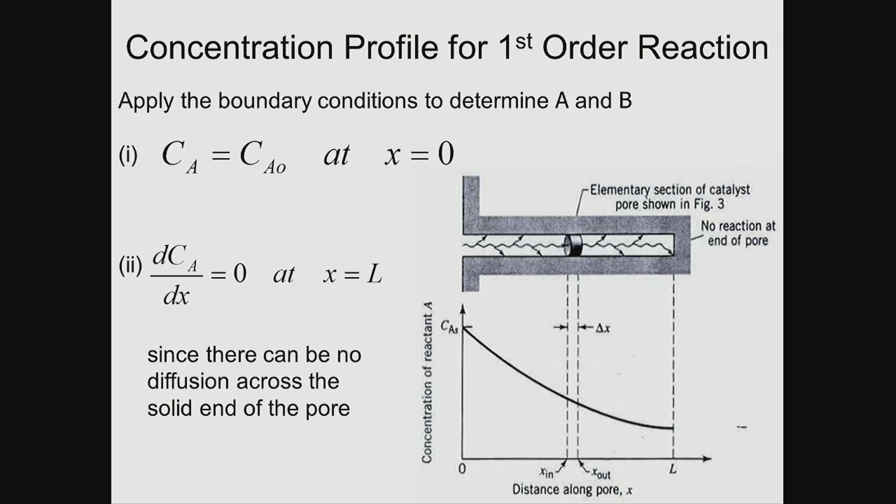Then we put up some derivation, which is in the notes in front of you and should be self-explanatory, to end up with this funny little term called 2ks over RD times the length. In a minute we're going to say that term under the square root symbol is M, and we're going to call it the Thiele modulus, ML.

So look at what you've got. You've got a term for a surface reaction, a term for a radius, and a diffusivity as defined by Fick's law, which I'm reliably informed Tom covered as well. He asked if you knew what he was talking about, and you all said no, but you've already done it before, so now it's all done. I just want you to remember what that looks like.

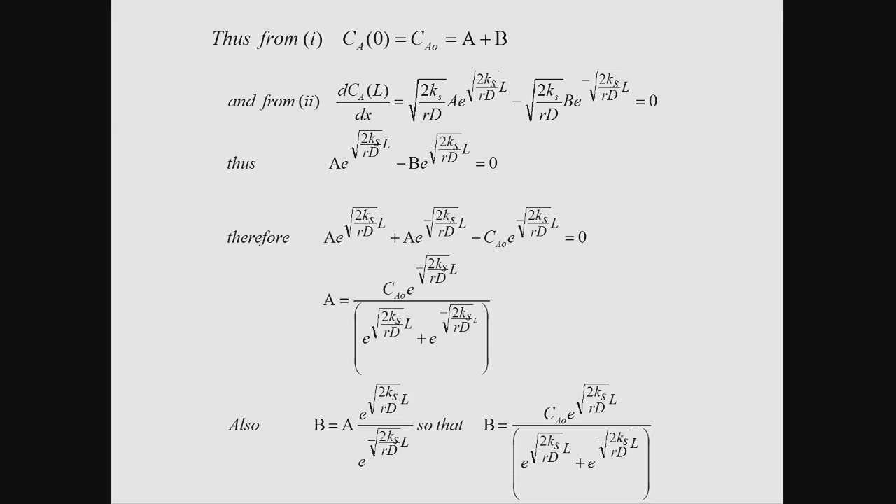This is a definition of a particular thing. You need to look at that, and we'll talk about hypercosines and hypertangents in a minute. All that comes down to something with a hypercosine, ml minus x, which is the length minus the x moved along it, over ml times the concentration in the bulk. So the concentration at any point along that pore is concentration x, at distance x along the pore of length L. And then you've got that term, which we've pulled out as 2ks over RD.

So without too much thought, you can look at that and say, what happens to M if we change the parameters within? If the radius is large, the diffusivity is going to be high. Makes sense? Big hole, nothing stopping it going through. Therefore that term will be large, that term will be small, much smaller than the other, which means it generally gets to be a bigger number. If the surface reaction is slow, that tells you something else. So if that's slow and these terms are as we've just predicted, then we'll have a fairly effective catalyst.

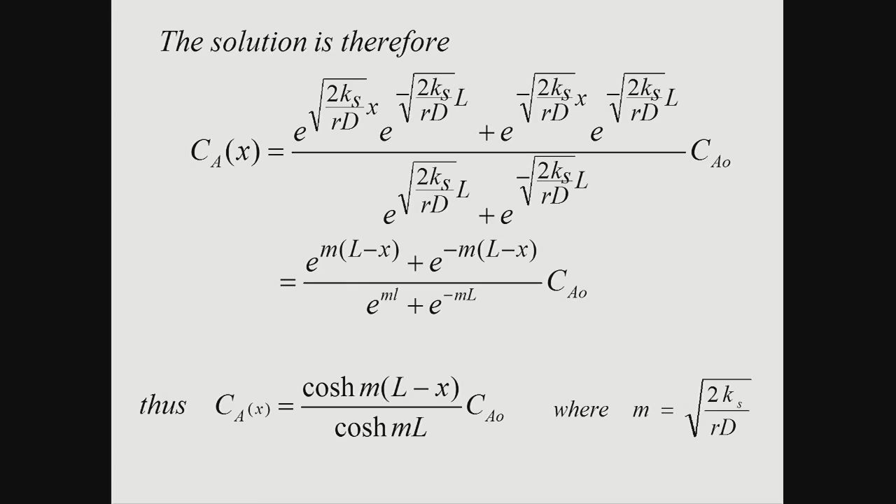If the rate is fast, then you have to argue, why are we using the pore in the first place, and we want the catalyst on the outside. So why are we doing that? This is how you've got to start to think, just rationalize it, because it's not always intuitive - in other words, it's counterintuitive. You think, well, I actually need a large rate. Why is he saying I need a low rate? I need a large rate. So you've got to think about that slightly in the context of the pore.

So look at the graph, the key graph. Always up in exam questions, this one. But a key graph anyway, because anybody who talks about effectiveness will mention Thiele modulus, effectiveness ratio, and how the concentration changes down the pore. So first, look at the axis: fractional conversion, fractional concentration down the pore. So concentration of A over the total that went in. A value of 1 is good, 0 is bad. Good and bad catalyst, we covered it very quickly last time, we'll just put it up for your memory banks.

Bad is at the bottom, and the one at the top is good. So an ml of 0.5 is pretty much ideal for what you would say. Remember, we're never going to get 100% effective - no way, not in reality. We can imagine it, but in reality we're not.

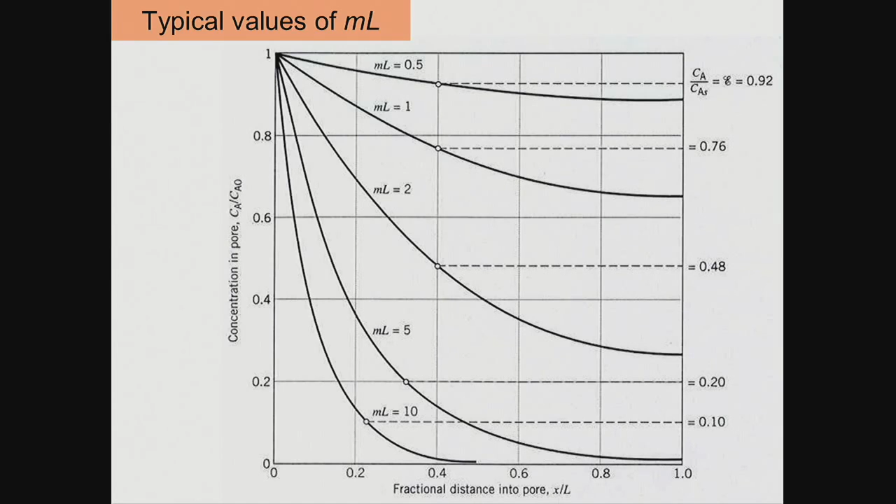So the way to remember it for an exam, and I'll put the schematic up - oh, this should actually help me, we've just explained that. That's a deal to remind me to do something. So we end up with an effectiveness factor. I can come back to the slides, I'll show you what I mean with the slide in a minute.

But we come on to effectiveness factor, and we've got the Thiele modulus, where we've got this Thiele modulus plotted against this effectiveness factor, and it gives a classic shape. There's a beautiful description of it, and there's lots of literature on Google, because I Googled it this morning just to have a quick look. There's some mathematical derivations which are for different shaped catalysts, but there's also a nice simple explanation of effectiveness.

So you've got to think of now we've got a porous catalyst, which we want to have a porous catalyst. We want it to be as effective as it can be. Not the steam reforming catalyst, but a porous catalyst.

So there's a normal standard line, which is shown there, is a derivation which we'll show in the notes and talk about again later on this afternoon. But allow for the fact that the dotted lines there are just because you might have more molecules produced or less molecules produced on your product from your reactant, so it's where there's a volume change. Let's focus in on the solid line, which is no volume change.

If effectiveness - and in fact the straight line is just simply a gradient of 1 over the Thiele modulus. So you can see that most of the time it's a straight line, which is, for you as engineers, fantastic. You will notice also, of course, it's also a log-log plot, because it's the scales of 0.01 to 1 on one side and 0.1 through to 100 on the other side.

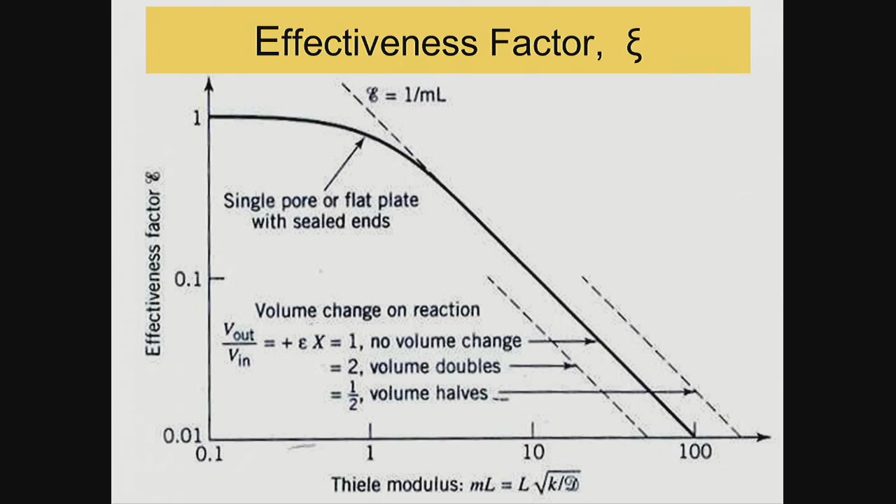So there is no resistance, and therefore if there's no resistance, you effectively get a line which is 1 over ml, and I'll show you why that is in a sec.

I don't think I skipped anything on those other slides, but I might go back and refresh between now and 2 o'clock, just in case I did. But just for the sake of negligible diffusional resistance.

In other words, now we're looking at that line, which is 0.5 versus the one, which is 10. So ml.

So nice and easy, just to remember it. I just like doing that. Don't get to do it often.

Same graph, just so that it goes there, but not straight.

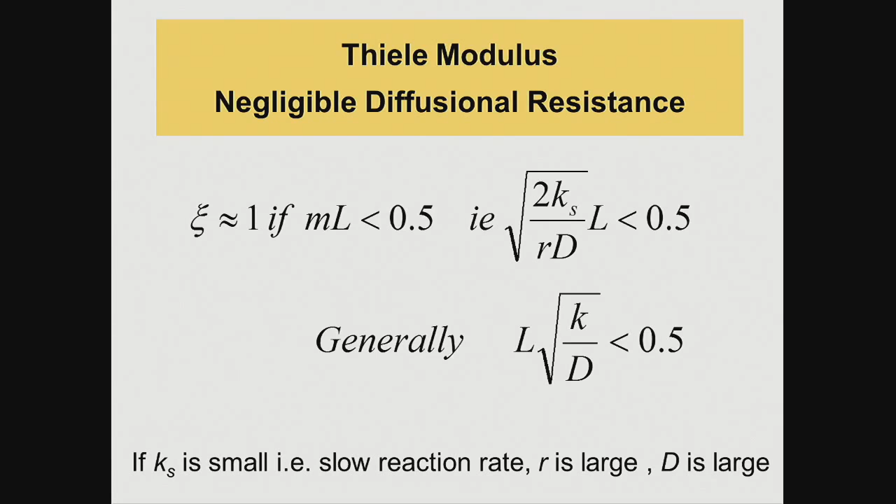So we're at that end of the graph. So you just look at the graph now that you've got before. It should be highlighted, if not you can highlight it yourself. So really you're at the beginning of the curve where it isn't proportional in size to the size of the pellet. You get no resistance.

If you've got no resistance, your rate of reaction is equal to the first order reaction. If A goes to B, your rate of reaction is equal to the rate constant times Ca, as you would do in CRE.

So the question was, do all the conditions have to be fulfilled? That is the scenario you would normally see, that the rate of reaction is probably slow-ish, because most chemical reactions are fairly slow, unless it's an oxidation, then it goes boom, so it's fairly fast. So most reactions are fairly moderate pace - that's just a statement for every organic chemical reaction. There will be orders of magnitude, but not significant changes.

So therefore, the two key parameters are the diffusivity. So if D is large, that means it's fast, and if D is therefore there is no resistance, so the number is small for D, so you've got good diffusivity, then R must be large by automatic inference because you've got no problem with resistance.

So that's just the condition it would be. Do they have to be applied? It's like everything - yes and no. But mostly the rate is fixed to within a certain boundary, and then the R and the D link very closely together. So your key determinant is your radius.

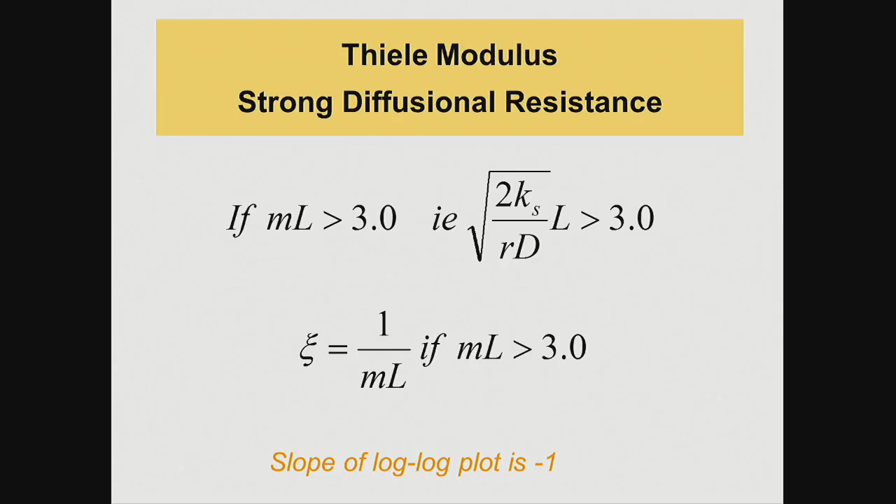So now, literally, I can't get past this young man here. I'm stuck, what am I going to do? I want to get to that guy there because he's the active site, but I can't get near him. So the only thing I can do is get rid of a few chairs and make him the active site. Then I've got a chance of getting near him.

So basically, all that straight line tells you, and it works for a ball, sphere, pellet, plate, for everything, is just reduce the length of the path. That's all it's saying. So everything on that line, which is here, that straight line, no matter what you've got, and you can see some of the shapes of the catalyst, that's why I passed them around. You can see solid cylinders, little tablets, spheres, little worm-like structures.

All of those fit on that graph. Pretty much, with the exception of the plate, which is just getting to the most effective part, all of them fit on a line which says, well, if I reduce the length of the diffusion path, I'll improve the effectiveness of the catalyst. And I don't want to belittle what we all do and what I've done for many, many years, but that's it.

The only control I've got over speeding something up, if I've got diffusion constraints, is I just make it smaller. Then the engineer comes along and says, Arthur, you can't just keep making it smaller, sunshine, because the moment you make it too small, we've got a pressure drop, and I'm going to blow your flaming catalyst out the end of the reactor. So that is it, it's no rocket science.

Now then, the next thing that I want you to remember, because it's in solid fluid systems, and it's nothing to do with me, but when you're doing reactor design or a design project: how many particles of the catalyst do you put across the bed to allow for no channeling in the reactor? In other words, no bypassing. What is the number and what is the equation? Because you need to always remember it, and I'll do it twice. It's nothing to do with this course, but it's important for you to remember.

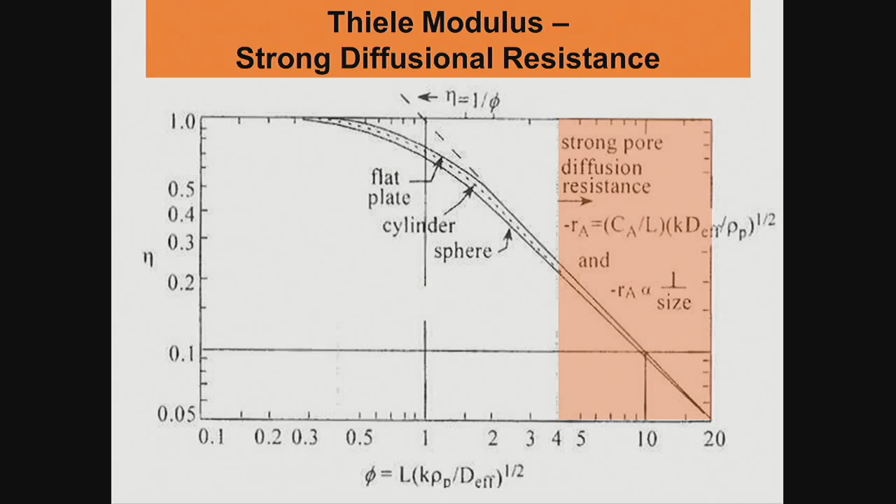I make the particle 1/10 of the size there, I end up with near dust. The near dust is going to blow out at the end of the reactor, it's going to contaminate everything, it's going to be a disaster. Stop giggling, I can see you.

So in effect, what we've done with the two scenarios, that's it. That summarizes the lecture, it summarizes the whole thing, but it's getting your head around that plot, which is here, understanding that that's effective, that is not. Why? Because the concentration of the reactant does not get into the structure that you've designed for it to do the job. You end up with those two equations.

I am now modeling my reactor based on the assumption that it is surface reaction limiting, because I'm telling you 75% of the time it is. I'm going to try to hope that none of my products or my reactants are adsorbed on it. And then the last thing is, I'm going to hope that my limitation on diffusion is not present. There are ways, and I will tell you how we do that in a lab, to determine whether we've got diffusion limitation or mass transport limitation. And it's dead simple, and it all links to the Arrhenius equation. So it's all stuff you've done, it's all stuff you just need to pull together from different points.

This is your summation. Obviously, if you've got diffusion restrictions, you're going to have this complicated thing on the bottom where you've got basically 1 over ml. Which is this one, but look what it looks like - rate constant times concentration with the diffusivity term. Bulk density of the catalyst, surface area of the catalyst, rate constant of the surface reaction, times the concentration that you've got at that point in the pore, times 1 over ml.

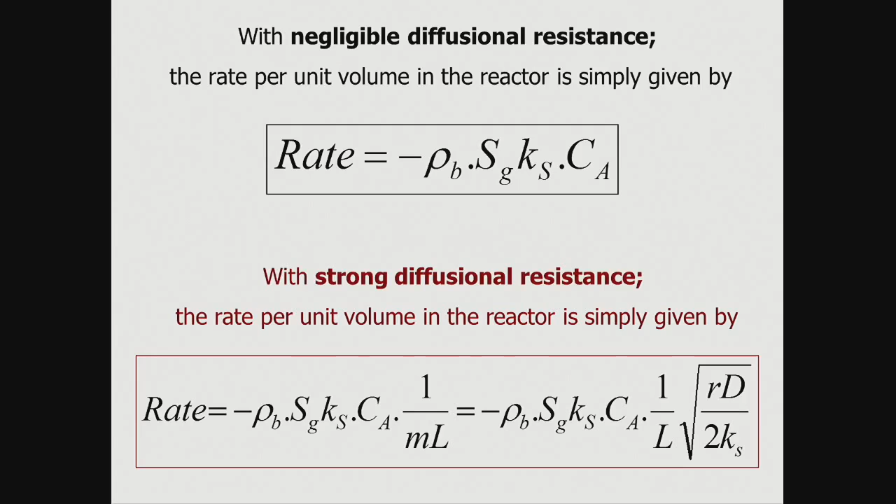If you get the bottom one, what do you do? Your immediate answer in an exam or in class this afternoon is: we divide the length, we get it smaller. We want to make the particle smaller, so we get this as low as we can so it becomes the equation at the top. Since you are engineers and I am a chemist, you think in terms of a log scale—you always change it by an order of magnitude, automatically trying to change something by a factor of 10 because it's a dramatic change. Notice with the concentrations we were trying to change it by doubling and quadrupling; it was rare that we did it by tenfold. Okay?

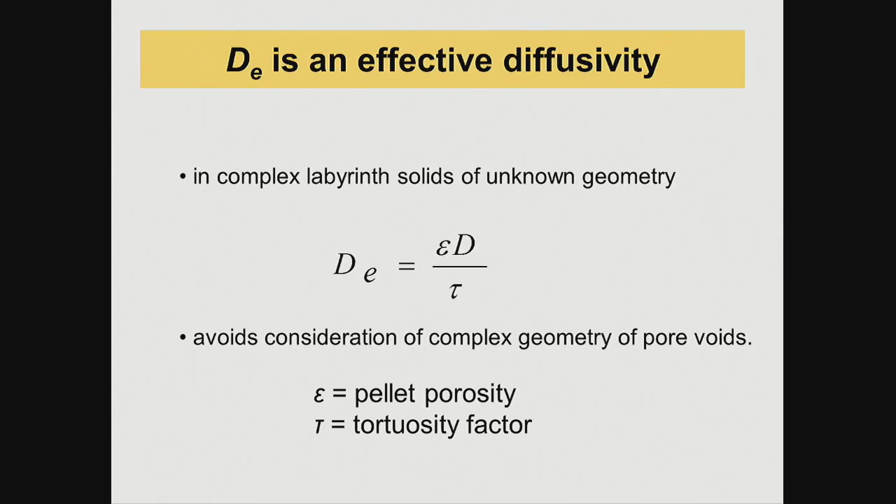I'm assuming now we've got that concept. We've done all the basic theory built on this very nice straight pore, but it's not true—false teeth back in place. So we have an effective diffusivity, and the effective diffusivity is the pellet porosity divided by the tortuosity, times the diffusivity. So the original diffusivity has got to be divided by the tortuosity. What do we mean by that? That's an example of a real pore—if you just drew a straight line, you'd say the distance the molecule travels, because it's a sine wave, is going to be twice the actual length. So in effect, your effective diffusivity is going to be half of what you predicted.

I said we'd touch upon diffusion, and I don't want your brains to explode, so we'll touch on molecular diffusion, Knudsen diffusion, and configurational diffusion, which occurs in things called zeolites. The stuff you're handling is a formed catalyst—those of you who looked at the wormy-like structure, that's an extrudate, pushed through something like sausage meat, coming out in exactly the same form. It has a different structure than the alumina we saw for the steam reforming catalyst. The steam reforming catalyst has virtually no surface area, whereas the zeolite has massive surface area with lots of holes, so lots of porosity, and those pores tend to wander and be sinusoidal, giving an effective diffusivity half of what you'd predict.

Knudsen diffusion simply means the molecule is now the size of, or approaching the size of, the channel, so it wants to interact with the channel wall—and that's good, because our active sites are on the wall, so we want that interaction. Molecular diffusion means two molecules bounce off one another—and if they bounce off and react, why would they need to? Why do you need the catalyst? You don't, because you could have done it in a tube. So in catalytic reaction engineering, we're always looking at somewhere between those, moving towards configurational diffusion.

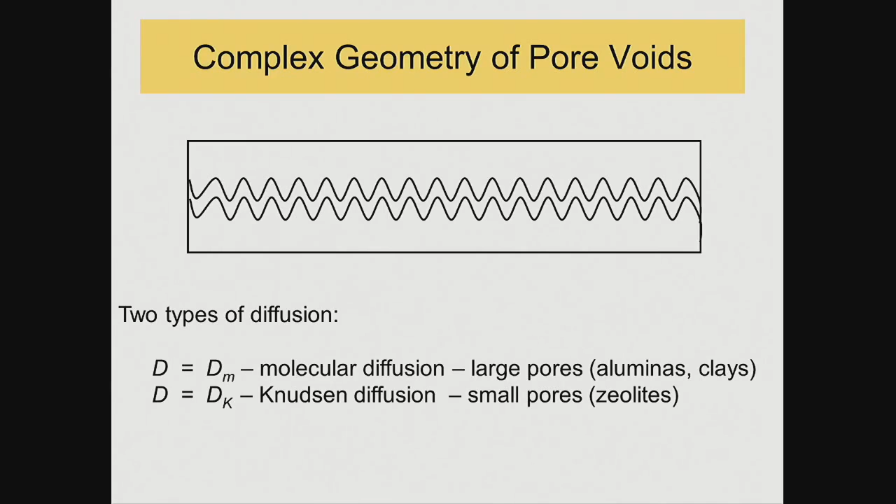Oh okay, I only had actually 4 slides. I could have finished that. Never mind.

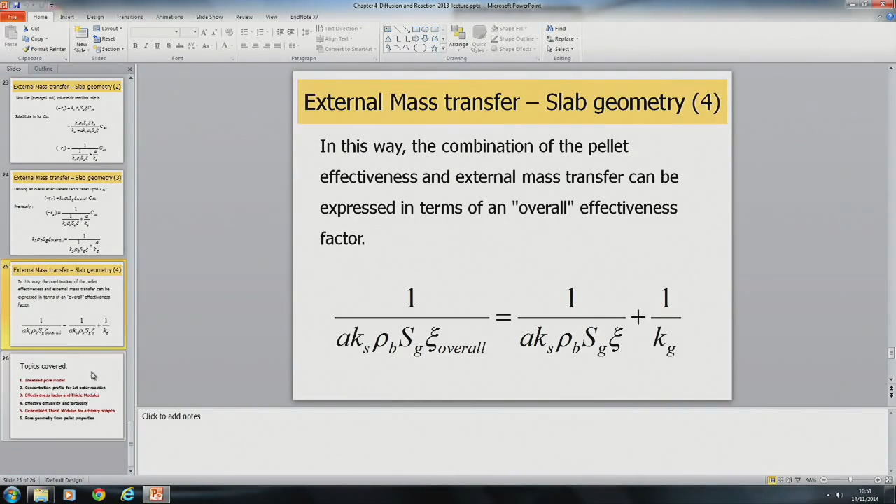Yeah, oh yeah, this is the particle diameter, and that's the diameter that you... Yes Simon, I need a little...